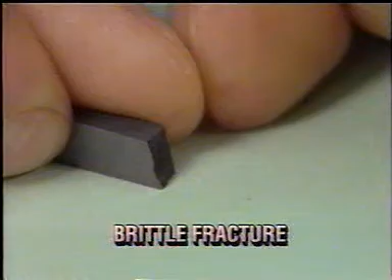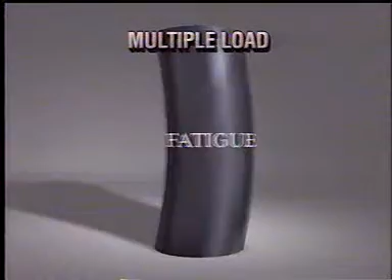These two terms, ductile and brittle, are usually applied to single overload fractures. Multiple load fatigue fractures also exhibit little or no macroscopic plastic deformation prior to fracture, so they too can be considered brittle. The terms ductile and brittle refer basically to the behavior of the metal.

A ductile metal is relatively soft and, as already defined, can often undergo considerable plastic deformation before fracturing. Soft steels, solder, copper wire, and aluminum foil are ductile. During manufacturing, ductile metals can be subjected to extensive forming operations, such as bending, stretching, compressing, twisting, and deep drawing, without rupture or cracking. Brittle metals, on the other hand, are likely to break with this kind of treatment. Very hard steels and gray cast iron will crack or fracture without showing any significant plastic deformation in such cases.

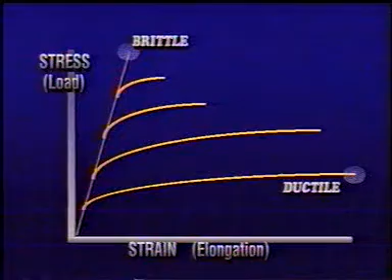Ductile and brittle actually represent two extremes of metal behavior, as opposite as black and white. But just as there are many shades of gray in between, so too many metallurgical conditions can make a metal partially ductile or partially brittle. That is, most metals show intermediate ductility, unless they are deliberately made to be very ductile or very brittle. Incidentally, the term metal in this program is used to denote all metal-base alloys.

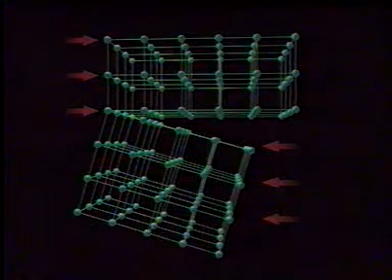Fundamentally, there are only two types of single overload fracture: shear and cleavage. Shear is typical of ductile metal fracture. Cleavage is a brittle fracture, referring to the brittle behavior of the metal. Actually, shear and cleavage refer to the behavior of the metal on the atomic scale within the crystal lattice, the name we give to the orderly arrangement of atoms. In many metals, these arrangements could be described as rows of cubes. We call these cubes unit cells, and the lattice a cubic lattice.

If a metal is fractured by a single load, the break can occur one of two basic ways: across the face of the unit cell, separating the cell from the adjacent unit cell, or the break can occur through the diagonal plane between the atoms of the cells. The term shear literally means slide. When the parallel planes of atoms in a cell or crystal slide across each other, the movement on this atomic scale is called shear. A small degree of shearing movement normally occurs in the elastic range.

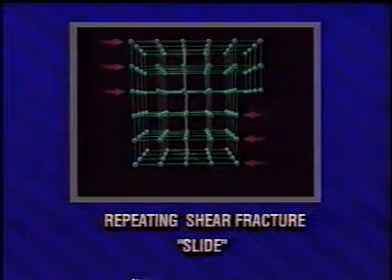As long as the loading remains in the elastic range, the movement is reversible and the atoms will revert back to their original position when the load is removed. But there is a limit to this elasticity. If the elastic limit of the metal is exceeded by the load, the atoms are forced to slide to new locations. This movement is irreversible, and the metal is now permanently deformed by yielding or plastic deformation. The elastic limit of the metal has been exceeded. The cumulative effect of this change is plastic deformation. When we test to quantify this total effect, we refer to it as ductility.

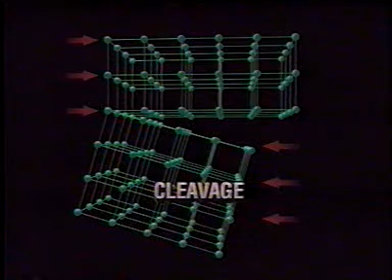Cleavage on this atomic scale means splitting. A very rapid split or separation of the crystal lattice could be expected along a side or a face of the cell. This cleavage fracture occurs before yielding and permanent deformation can occur. Cleavage is a brittle fracture. Actually, cleavage is only one of two different brittle fracture mechanisms. The other, known as intergranular, will be discussed later in the program. For now, it's easier to consider only shear and cleavage as the fundamental types of single overload fracture.

Shear and cleavage are quite different in many ways. The movement of shear is sliding. The movement of cleavage, splitting. The rate of fracture in shear is generally slower. In cleavage, faster. With shear, there is deformation. With cleavage, no deformation. Shear is typical of ductile metals, cleavage of brittle metals. Generally, a tensile fracture that has sheared appears dull and fibrous. Cleavage fracture is usually bright and sparkling.

Certain factors will affect the ductile-brittle relationship in metals. These factors indicate the trends most likely to affect the behavior, particularly in metals such as iron and steel, which have a cubic crystal lattice. Temperature. At high temperature, ductile behavior is more likely. At low temperature, brittle is more likely. When the rate of loading is low, ductile behavior is more likely. When high, brittle is more likely.

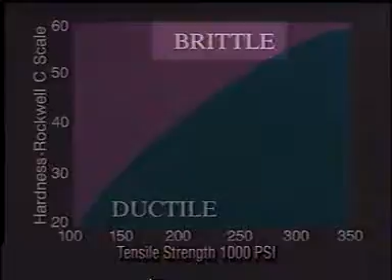These notches are in the form of very thin graphite flakes. And according to the indicators, notches indicate a trend toward brittle behavior. In reality, the notches override the strength and hardness factors. Hence, cast iron with low strength and hardness appears to fracture in a brittle manner. On a microscopic scale, however, gray cast iron still behaves in a ductile manner between the graphite flakes.

Gray cast iron is an important exception to strength and hardness as indicators of the trends most likely to affect behavior in metals. Ductile fracture.

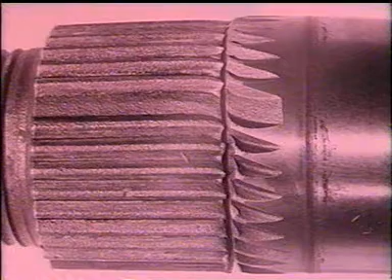One of the first things to look for in a fracture is distortion. Distortion is usually an indication of ductile fracture. But sometimes there are questionable cases when little or no distortion by plastic deformation is present, as observed at low magnification. In these cases, an electron microscope can be used to study the characteristics of the fracture surface itself, assuming that the surface is in a suitable condition.

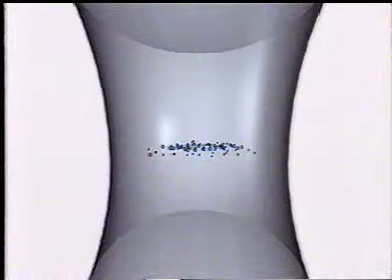Magnified up to 10,000 times in the electron microscope, the surface of a ductile fracture shows a characteristic mass of half microvoids. These are called dimples. When overload is the principal cause of ductile fracture, most common structural alloys fail by a process known as microvoid coalescence. Tiny cavities form at regions of localized strain, such as that associated with foreign particles, inclusions, and grain boundaries.

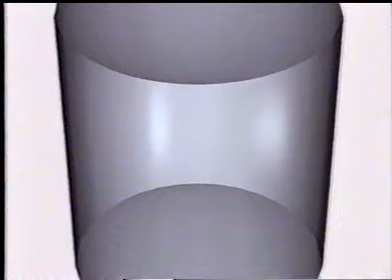As the strain in the material increases, these microvoids grow in size and begin to join together or coalesce. Eventually, these coalescing microvoids join to form a continuous fracture surface known as dimple rupture. The sequence of events leading to fracture in a ductile metal begins with necking down of the specimen to which a tensile force is applied.

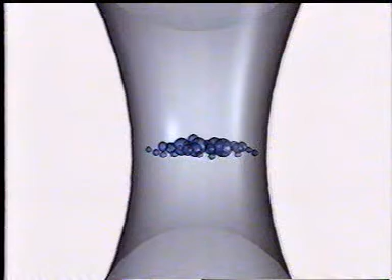As the specimen necks down, the fracture initiates internally with the formation of microvoids in the necked region. These microvoids grow or coalesce to produce an internal crack. The final separation of the cross-section occurs by shear rupture. The fracture has a characteristic cup and cone appearance after the necking down, and the final rupture produces a shear lip, which forms the wall of the cup.

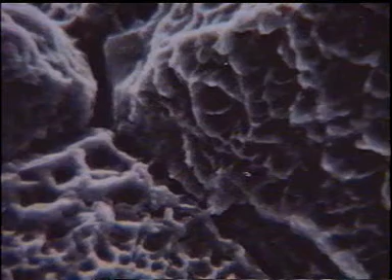With an SEM, a scanning electron microscope, the fracture surface of a dimple rupture exhibits tiny cup-like depressions. These are the dimples, which are the microvoids torn apart during the rupture process. The size of the dimples on a fracture surface is governed by the number and distribution of microvoids that are formed. When these nucleation sites are few and widely spaced, the microvoids grow to a large size before joining. The fracture surface then contains large dimples.

When many microvoids are formed and adjacent microvoids join before they have an opportunity to grow to a large size, the fracture surface contains many small dimples. The shape of the dimples is governed by the state of stress within the material as the microvoids form and coalesce. Under conditions of uniaxial tensile load, which applies a generally uniform strain across the section of metal, the resulting fracture essentially forms equiaxed or round dimples. Depending on the microstructure and the ductility of the material, the dimples can exhibit a very deep conical shape, or they can be quite shallow.

The shape of the dimples can vary with the mode of stress applied to the metal. A tear fracture, applying a tensile stress at one end and tearing the metal, may exhibit elongated dimples. The dimples are elongated across one axis, and the end of the dimple is open. That is, the dimple is not completely surrounded. In the case of a tear fracture, the elongated dimples on both fracture faces are oriented in the same direction. The closed ends of the dimples point to the origin of the fracture. This characteristic of tear dimples can be used to establish the direction of fracture propagation.

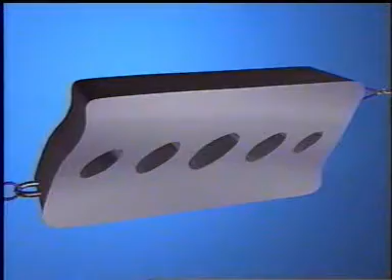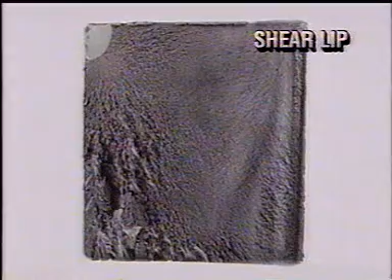A torsional shear fracture, however, exhibits elongated dimples that point in opposite directions on the mating fracture faces. Sometimes the slant fracture or shear lip of the ductile fracture resembles a picture frame on a relatively thick rectangular section. The shear lip shows that the fracture emerged from the interior of the metal at that location.

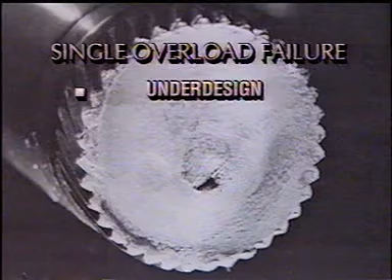Service failures caused solely by ductile fracture are relatively infrequent. When they do occur, the structure or machine component is often stated to have failed as the result of a single overload, as from an accident. Single overload failures may be the result of a part having been under-designed for a specific set of service conditions. The design of parts includes the selection of materials and their heat treatment, so these factors too can be implicated in the fracture. The parts may be improperly fabricated or fabricated from defective materials.

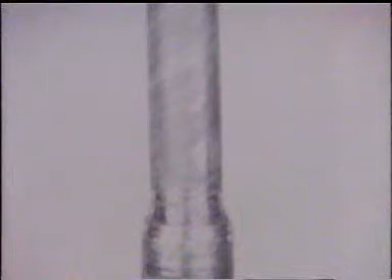Fracture may be the result of the part having been abused, that is, subjected to conditions of load and environment that exceeded those of the intended use. Forces generated in an accident, for example, are a violent form of abuse and can be extremely high. Here is a simple example of ductile torsional fracture of a machine component. A rear axle of a race car fabricated from an AISI S7 tool steel fractured as a result of a torsional or twisting overload.

The deformation marks around the smaller diameter section of the shaft show the effects of twisting by the high input torque. The cause of the failure was improper hardening of the shaft.

Before going on with ductile to brittle and brittle fractures, let's review some of the important points about ductile failures and their causes. Ductile fractures differ from brittle fractures in that they usually undergo appreciable plastic deformation before actually breaking. A ductile fracture is typically a shear fracture. Shear is the sliding of the atomic planes in the crystal lattice of a metal. A tensile fracture that has sheared appears dull and fibrous.

When overload is the principal cause of ductile fracture, most common structural alloys fail by microvoid coalescence. Coalescing microvoids join to form a fracture surface of microscopic dimples. A ductile fracture on a microscopic scale is a dimple rupture.

Certain factors affect the ductile-brittle relationship in metals. Metals are more likely to tend toward ductile behavior when the temperature is high, when the rate of loading is low, when the geometry is without a notch, and when the strength and hardness are low.

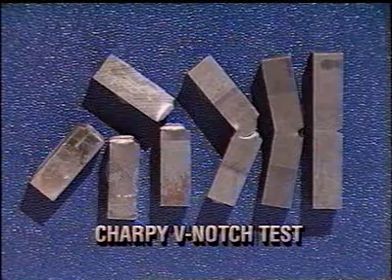This brittle fracture is induced in certain relatively ductile metals by low temperatures or impact and is usually associated with notches. The ductile to brittle transition can be demonstrated quite readily by the Charpy V-notch impact test. The results of tests conducted on a low-carbon steel show the drop in absorbed energy as the temperature decreases.

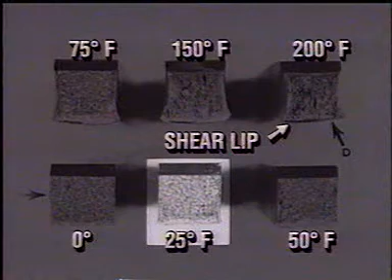The transition from ductile to brittle fracture is made visible by a decrease in the amount of lateral expansion on the compression side of the specimen. The shear lip is reduced as the test temperature decreases, and the appearance of the fracture surface changes from a rough ductile fracture to a relatively smooth, flat, brittle fracture.

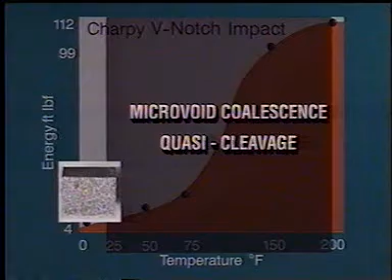At temperatures within the transition range, crack propagation occurs by both microvoid coalescence and quasi-cleavage. This new term refers to fractures that exhibit a rupture between brittle and ductile, with the appearance of mixed dimples and cleavage. The quasi-cleavage is predominantly confined to the central region of the fracture surface.

Brittle fracture. Brittle fractures in service are frequently initiated at stress concentrations that are present in the structure of the manufactured product. Discontinuities that develop during service can also initiate brittle fracture. The initiation area, strongly influenced by stress concentrations, may take any one of 5 forms.

First, notches. Notches are discontinuities caused by abrupt changes in the direction of a free surface. Among the common intentional notches are sharp fillets and corners, holes, threads, splines, and keyways. Notches can be produced accidentally. Mechanical damage, such as dents, gouges, or even scratches, can start brittle fractures. And notches can also be produced by sharp contour changes created as a result of poor welding practice.

When fracture occurs, it initiates at a notch. It makes no difference whether the notch is intentional or accidental. The radial marks on this fracture surface converge at a surface scratch that initiated the fracture.

The second form of initiation area results from laps, folds, flakes, large inclusions, forging bursts, laminations in sheet and plate, and undesirable grain flow introduced during working operations. All these may influence the location of fracture origin.

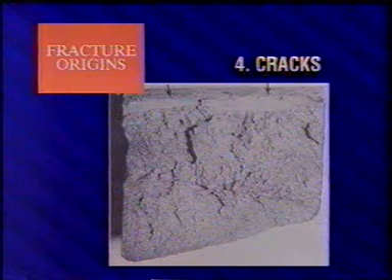In fact, the single most prevalent initiator of brittle fracture is the fatigue crack. The fatigue crack accounts for at least 50% of all brittle fractures in manufactured products, and this is a conservative estimate. The fracture surface of an ASTM A36 structural steel member shows this failure began with a fatigue crack, which progressed only a short distance before brittle fracture occurred.

Finally, residual stresses. Residual stresses are not defects in a geometric sense, but they can be an important factor in the initiation of brittle fractures. Here is a brittle fracture that originated from residual stresses at a hole punched in a steel plate. The chevron pattern is evident on the mating halves of the fracture, pointing back toward the hole.

In such situations, moisture may have had access to the hole and contributed to the formation of the initial crack. Residual stress effects are most important in hard, strong metals. Softer, weaker metals can deform and relieve the residual stresses.

Cleavage, the basic brittle fracture mode, is a low-energy fracture that propagates along well-defined crystallographic planes. These are known as cleavage planes. As mentioned earlier, cleavage is only one of 2 different brittle fracture mechanisms. The splitting cleavage along the crystallographic planes is transgranular. The cleavage occurs through the crystal grains.

The other type of brittle fracture is intergranular. Intergranular fracture occurs between the crystal grains of the metal through the grain boundaries. This is due to a variety of mechanisms that make the grain boundaries weaker than the grains themselves.

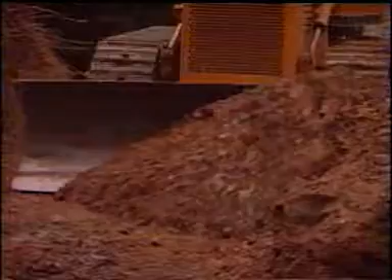The cause of an intergranular fracture is difficult to recognize because the complexity is promoted by the cumulative effect of environmental factors and sustained stress, by grain boundary embrittlement, and by impact loading. Steel is not the only metal that encounters brittle fracture, but steel, a primary metal in many industries and products, is faced with a variety of potentially serious brittle fracture possibilities. Many forms of embrittlement of steel parts can lead to intergranular brittle fracture. At least 9 forms of embrittlement can occur during thermal treatment or elevated temperature service.

Strain age embrittlement in low carbon steel. Quench age embrittlement in low carbon steel. Blue brittleness in some carbon and alloy steels. Temper embrittlement in constructional alloy steels. Tempered martensite embrittlement in high-strength, low-alloy steels. Stress relief embrittlement in weldments. 400 to 500 degree embrittlement in ferritic stainless steels. 400 to 500, by the way, is centigrade. In Fahrenheit, the embrittlement occurs between 750 and 930 degrees.

Sigma phase embrittlement in high chromium steels. Graphitization in carbon and low-alloy steel high-temperature piping. And intermetallic compound embrittlement in galvanized steel. In addition, steels and other metals and alloys can be embrittled by environmental conditions. Most prevalent are hydrogen embrittlement, stress corrosion cracking, and liquid metal embrittlement, which will be discussed in another program. This is not all that can be said about the causes of brittle fractures. The subject is far too vast and complex, with far too many interrelated factors to be covered in one program.